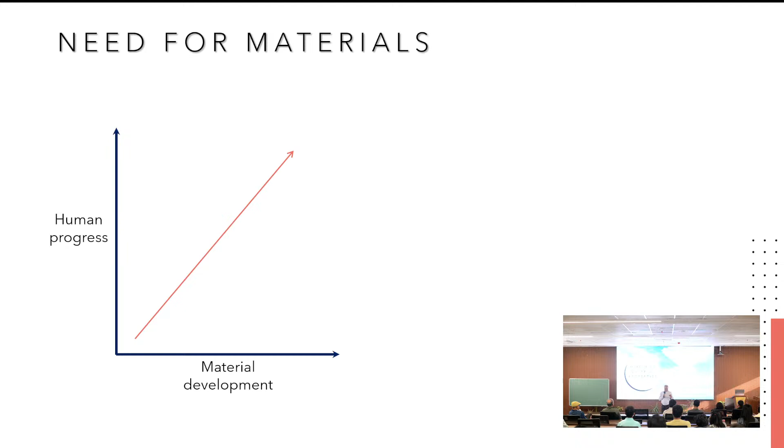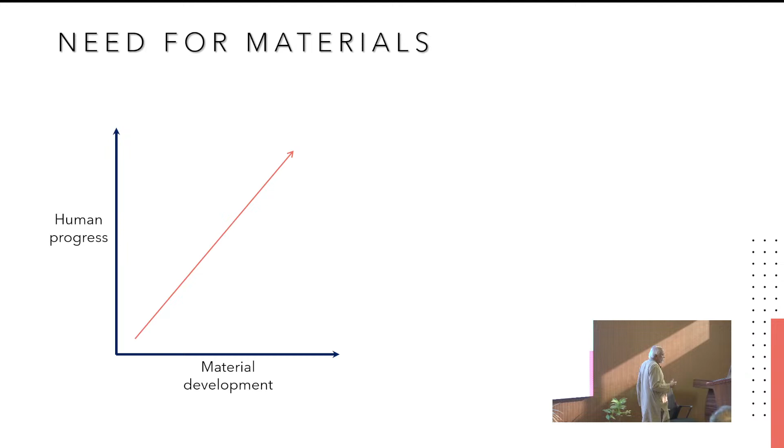As is, there is a correlation between energy consumption and the development stage of a society. There is a correlation between how much per capita energy humans consume and the state of development of society in some sense. So similarly, you can see that as we progressed, we have constantly developed new materials, or you might say as we developed new materials, we actually progressed. So that means there is a very close relationship between these two things.

So in the early stages, primarily our focus was on utilizing naturally occurring materials, right? So naturally occurring materials can be of two types when you look at our forefathers.

Is it going? Yeah, okay, thank you.

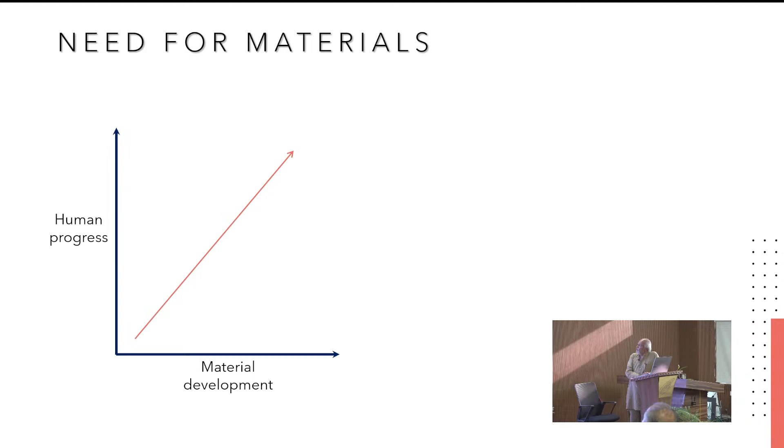So they can be of two types. One is directly usable, which means as is present in nature, you just modify, scrape, sharpen, do a little bit of work on it, and you can use them directly, right? The other is something that needs processing. That means it's naturally available, but you can't use it as it's available in nature. You have to do something to it to improve its properties. So there are two categories there.

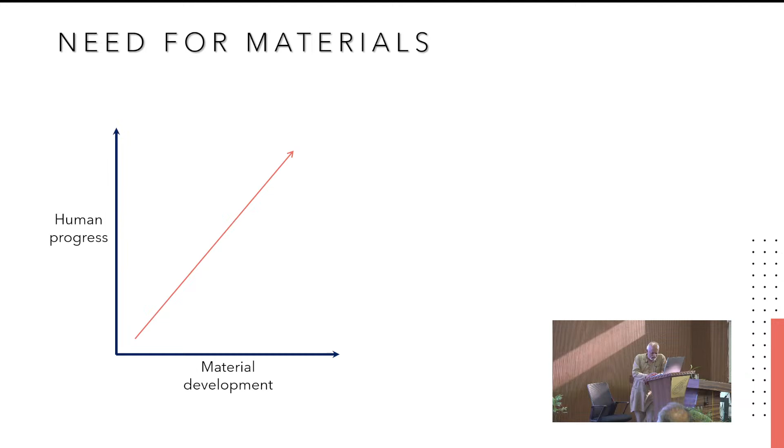And these are mostly tools that are used for hunting, and you should remember those days humans primarily engaged in generation of food, and food was largely generated by hunting. So they were hunter-gatherers, and one of the things that set them apart, as Guruprasad mentioned, is the fact that they could actually make these implements using naturally occurring materials, which made them a step ahead of the rest of the animal kingdom. So you could develop sharp tools.

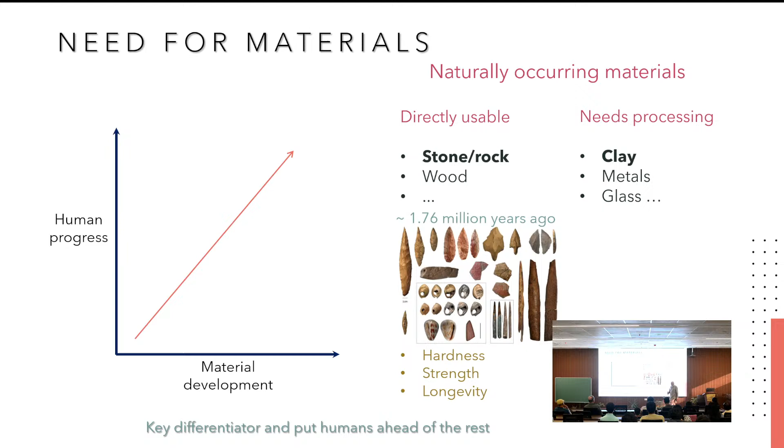So what are the properties that these need to have in order to be effective? They need to be extremely hard. They need to be strong. They should not break when you're hunting. You shoot something and it breaks and you're finished. And the other was longevity. That means you want these tools to last for a long time. So these were probably some of the most important properties under consideration for those who developed these implements early.

And of course, clay requires processing, which means you have to fire it. You can use clay, but unless you fire it, you will not be able to develop these kinds of things. And so these date back to about 6,500 BC, which means almost 8,500 years ago. So some of the earliest pottery that people have seen was these from various parts of the globe.

And what are the properties that this material had? Formability, that means how easily can you shape them into various objects that you desire. So that was one. Of course, strength, longevity, and because these are containers, you need to be able to hold liquids without leaking. So that's another property that you want. Porosity needs to be controlled. Since the focus of this talk is really on properties, I just want to highlight the properties that early humans would have been looking forward to having in these materials.

And of course, thermal conductivity. That means if you need to heat something up, you need to be able to conduct the heat through these containers. So those were probably some of the very early materials developed using naturally occurring materials, both directly by making a little change in the shape or by using processing methods. The second, of course, is wood. Wood was also much earlier. So this is about 300,000 years ago.

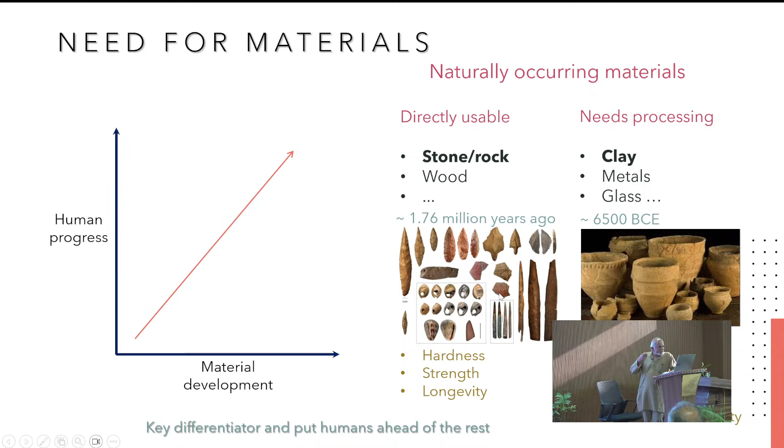People have learned how to use wood. And wood, as you know, has different levels of hardness. As they are procured, some wood is relatively soft depending on the nature of the wood itself, and others are hard and much stronger. So early years of utilization of wood would have actually gone through this. People would have gone through this selection process to identify wood that is strong, doesn't decay so soon, doesn't putrefy, and so the oil content in the wood would have been very important.

You know, oil content in the wood and the density of wood is what distinguishes the hardness and processing properties and the strength of the wood itself. So again, workability and strength would have been the key properties that we're looking for.

And of course, glass, which is about 3,000, which means 5,000 plus years ago. And one of the properties apart from what you had in clay is that these were transparent, and there would have been a very important development in the eyes of people who first did it. That is to get some object that is not opaque but is transparent, while at the same time has many of the properties that clay did. So these are a couple of examples of early materials that people had, and also it describes some of the properties that our forefathers would have actually been looking for in these materials.

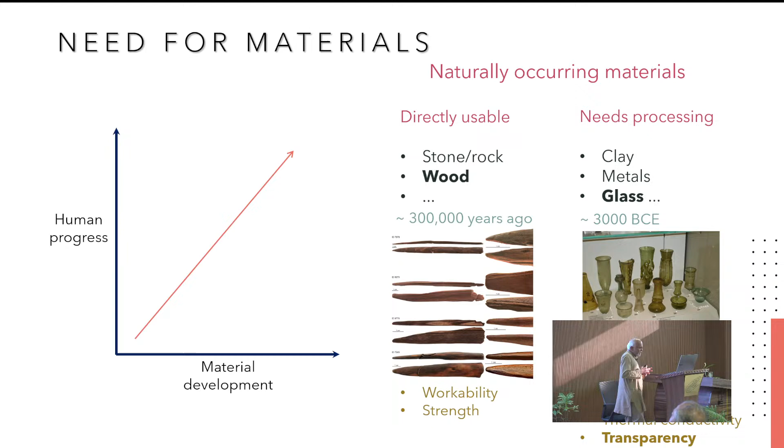Okay, and then came the age of metals and alloys. These are clearly materials that need processing, right? They are not used directly. And some of the earliest metals that were used was copper. That's roughly 5,000 BC, and then bronze, which is an alloy of copper and tin, which is about 3,500 BC, and iron, which is more recent, which is about 1,500 BC. So these are the three main metal-based materials that early humans actually learned to work with.

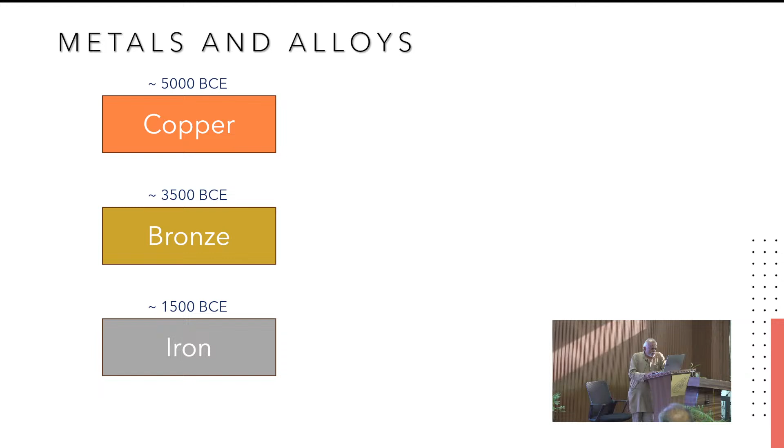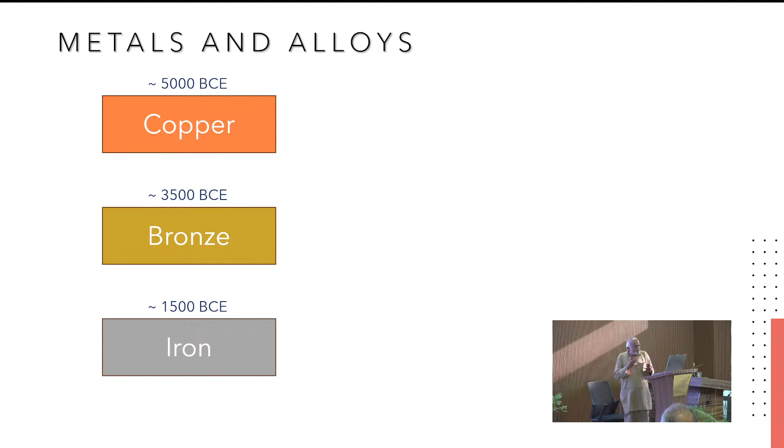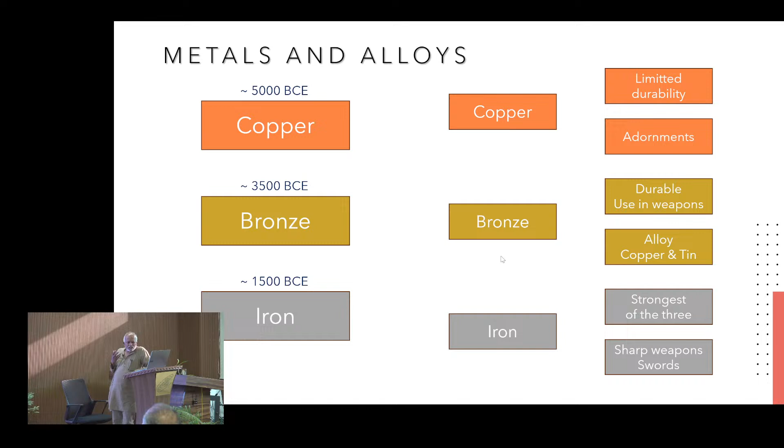And of course, what are the properties of these kinds of materials that you would be interested in? Copper has limited durability and was largely used for coinage, so coins and adornments. That means decorative parts to wear, okay, adornments. They were primarily used for that. Bronze, which is an alloy of copper, was much harder and much stronger, and began to be used for weapons, okay. So durability was one of the properties that were there, and hardness improved enormously.

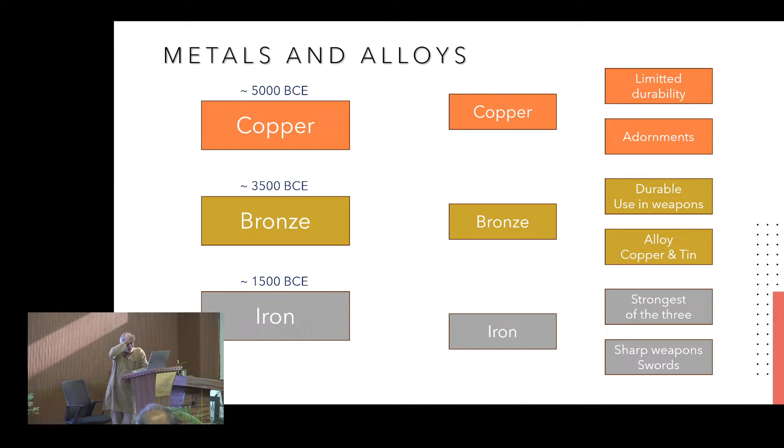So as I mentioned, bronze is of course an alloy of copper and tin. Alloying, the idea of mixing two metals, was one of the earliest forms of improving properties of metals, okay, and this gave a remarkable improvement, much more than what you would expect compositionally. So that means very small amounts of a second component can enormously improve the properties of metals. This is something metallurgists and early man realized.

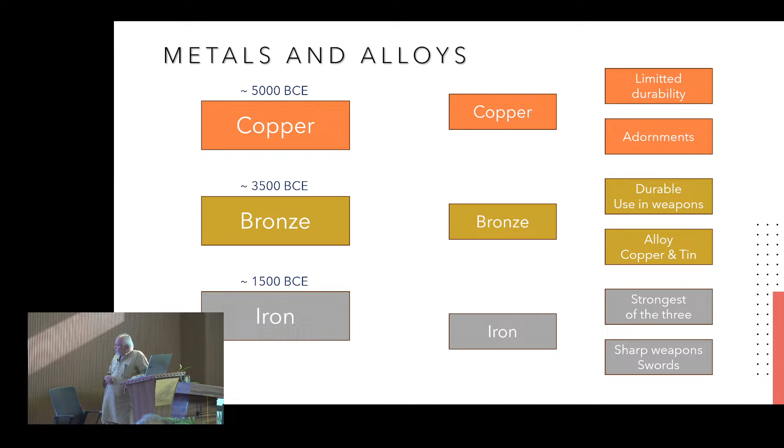And iron, of course, was the third one, which is the strongest of the three, and eventually replaced much of the earlier metals that were used by humans. So iron became the workhorse subsequent to iron's discovery. Iron's strength made it among the best materials that you have. And from iron, of course, steel; I will tell you the story of steel. The sharpness of swords and so on were clearly far better with iron. So the period between 1200 BC and 600 BC is roughly believed to be, in some region, the Iron Age.

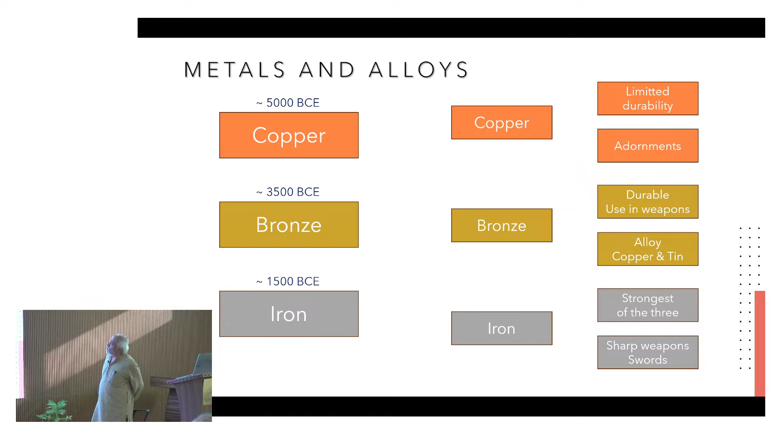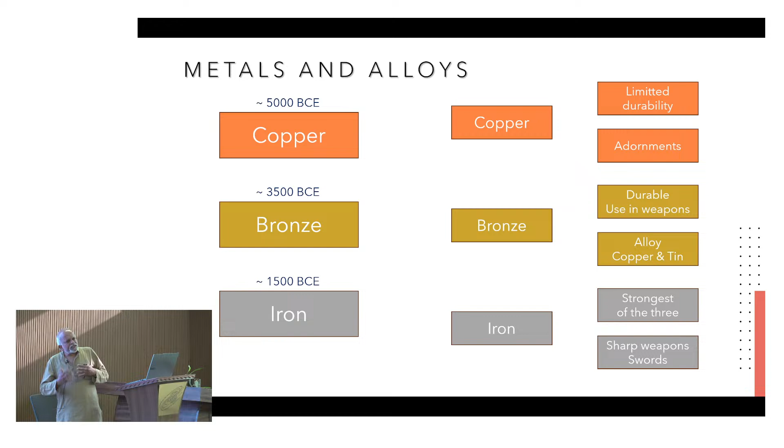Okay, iron was a transformative material because it changed very many things, just really made humans far more powerful and far more progressive than the rest of the species. I would say it was really a stage that demonstrated a dramatic difference of the importance of materials in human development. So, the key properties of iron, as mentioned earlier, are its strength, hardness and formability. By formability, I mean I can shape it in various forms that I require.

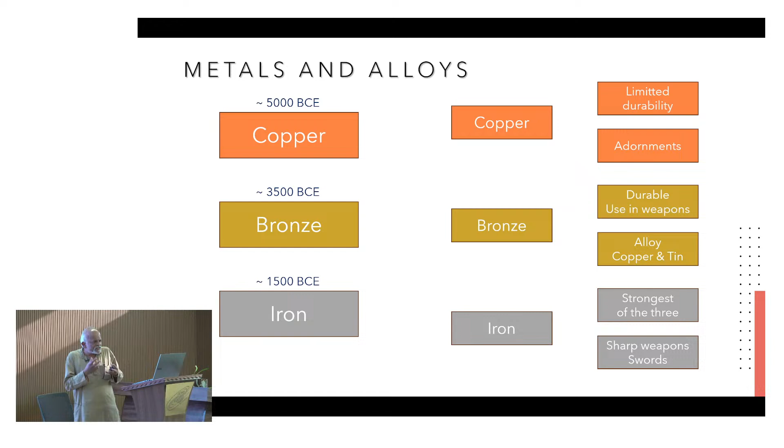The early way of shaping metals actually was to soften the metal by heating it. That is, you make it a sponge iron, that is, get it very hot and slightly porous, and then you hit it with a hammer or something that is hard to form it. Okay, so that was one of the earlier methods of making it. This is a good method, but you can't get fine tools. Fine tools with high levels of sharpness are not possible by this process of basically deforming materials at high temperature.

That means you shape it when it softens a little. Okay, so finer tools and weapons were still not accessible, although for a lot of purposes that process worked. The most important development in handling metals was actually to be able to warm it up to temperatures where it became molten. And that came only when they realized how to get furnaces, or how to get material hot enough to be able to melt metals. And that came in later.

Okay. Metal is a single element, like iron is one element. Alloy is a mixture of two elements. So, if you have copper and tin, you get bronze. So, copper is a pure element. In which class are you? Fifth. Okay. No, it's okay. It's all right. So, an element is a pure element. You know what an element is? Yeah. So, metals are pure elements and alloys are a mixture of two elements.

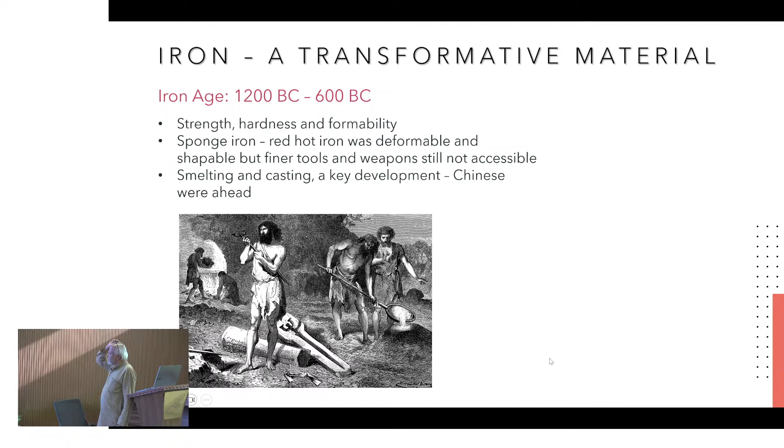So it means societies in India, China, and in the Middle East, Mesopotamia, knew how to work with metals. And these were around 1500 BC. People knew how to melt, work with metals, mix alloys, and generate stronger metal based materials.

So, I think the other most important, more contemporary development that happened in materials is the discovery of steel, that is iron with a small amount of carbon. Adding a little bit of carbon improves its hardness and strength remarkably. This most likely would have been a chance discovery, because the way they melted the ore and isolated the pure element was by cooking it over coal. Coal is primarily carbon, so what might have happened in the early stages is a little bit of carbon would have migrated into the molten iron and generated a mixture of iron and carbon, which was steel.

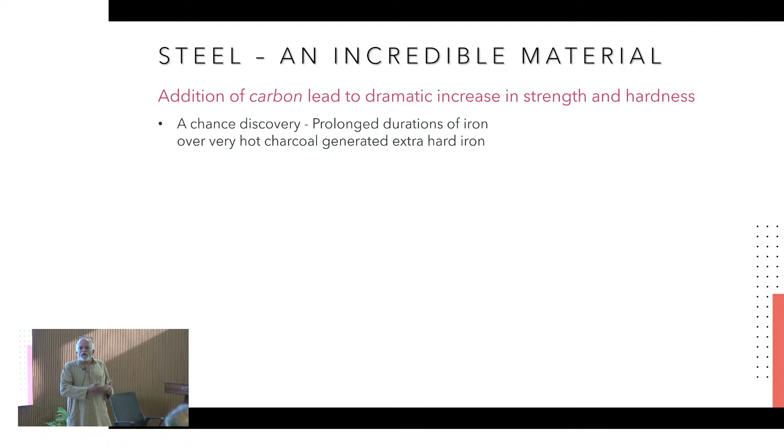In all likelihood, as is conjectured by somebody who has written an article which I was reading, they may have left the molten iron overnight over hot coal. Over a long period of time, molten iron would have gradually taken up a little bit of the carbon from the coal. And to their surprise, they would have found that the properties were far better.

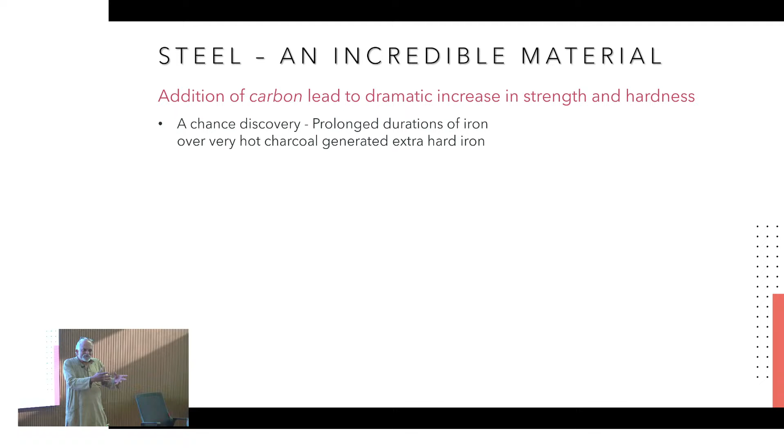They were also scientists like today, except that they did not have the tools to investigate what was happening as we have today. But by experience, by looking at what would have happened, they would have conjectured that leaving the metal for longer times over coal actually improves the property. Go on.

Yeah, it has an optimum level of carbon. You can change the properties of steel depending on how much carbon you have. Okay, stainless steel is another composition of metal, iron, which has both carbon and some other elements. So, you can change the composition. These are complex phase diagrams.

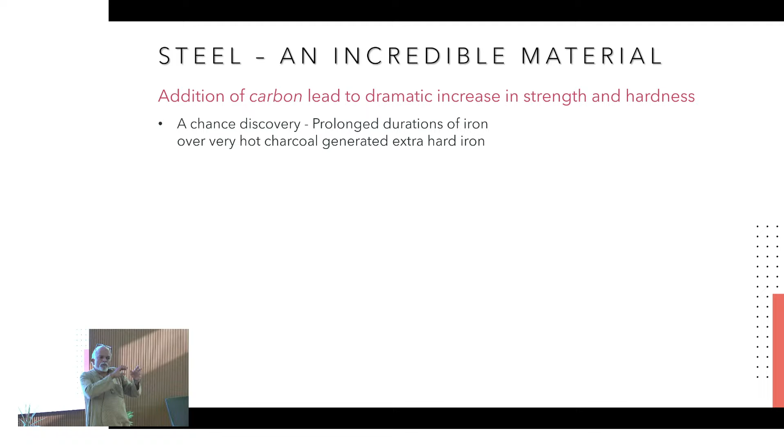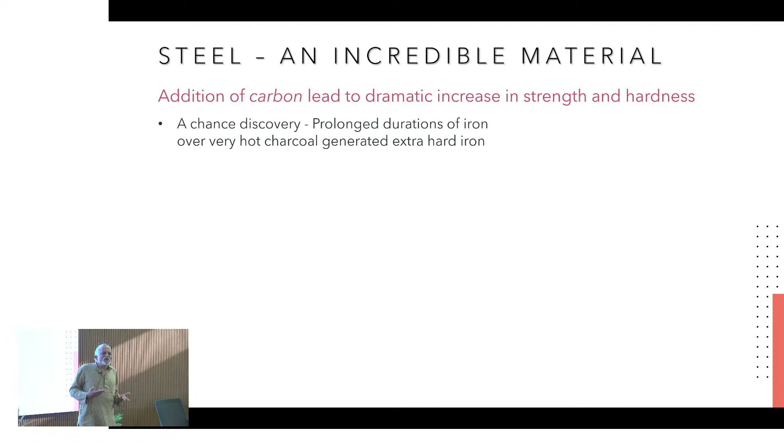Phase diagrams means, if you are looking at how a property evolves as a function of composition, it does not necessarily simply constantly improve. Many of the properties go through a maximum. That means some amount is okay, but if you add more than that, the property actually goes down. The natural way to think about it is, if I add a little carbon, it is getting better, so why don't I add more carbon, it will keep getting better. That does not always work, for a variety of reasons.

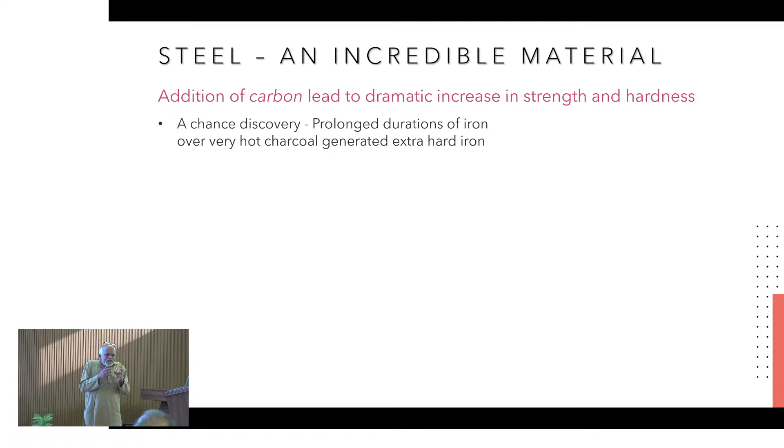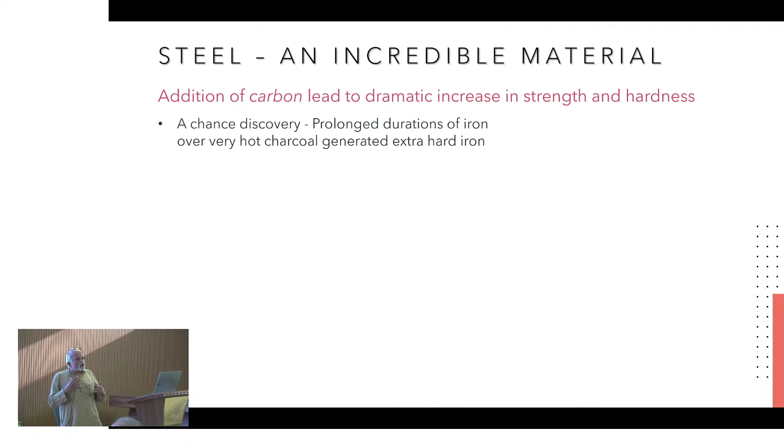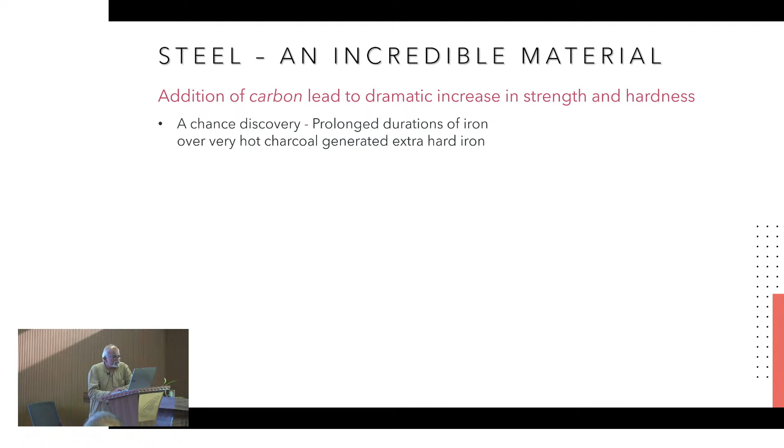And the most important thing about these tools was that when you discovered steel, you could work it into much sharper implements. The efficacy of your weapon depends on how sharp it is. If you have a blunt knife, you're not going to be as effective as if you have a sharp knife, clearly, right? So people who learned the technique of making steel and making much sharper weapons had an upper hand in the way they handled their enemies.

So think about societies in the earlier years. They were largely societies going around trying to capture more property, trying to get richer, trying to get more food. So they were hunting around, constantly moving from one region to another to find better. And if, in their process of moving, they encountered resistance, they would have to fight. And those who had better implements would win the fight, and they would have more access to resources.

So societies progressed by gaining access to resources, and the only way they gained access to resources was to constantly move and look for resources in neighboring areas and actually fight wars with those in the neighboring areas. So you can see it would have made a very important difference to early development of societies.

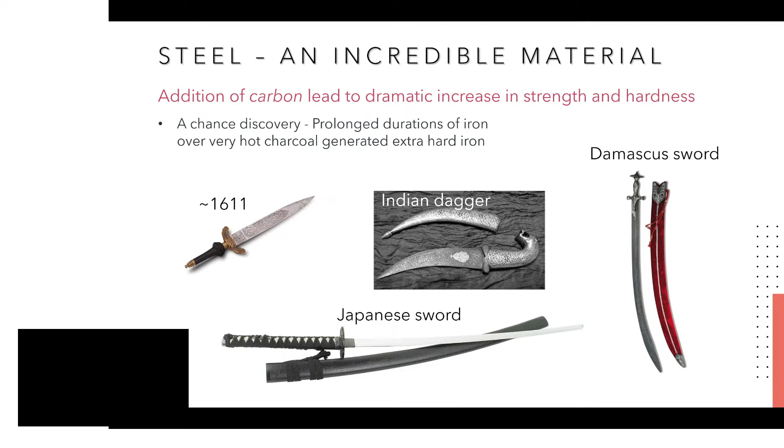Mass scale production of steel had to wait a little longer, although blast furnaces that were not electric, coal fired and other blast furnaces, existed prior to this. Mass production of steel had to wait for the invention of electric power. Most of the electric arc furnaces required electricity, right? And electricity happened a little over 100, 110, 120 years ago. So it's not so old.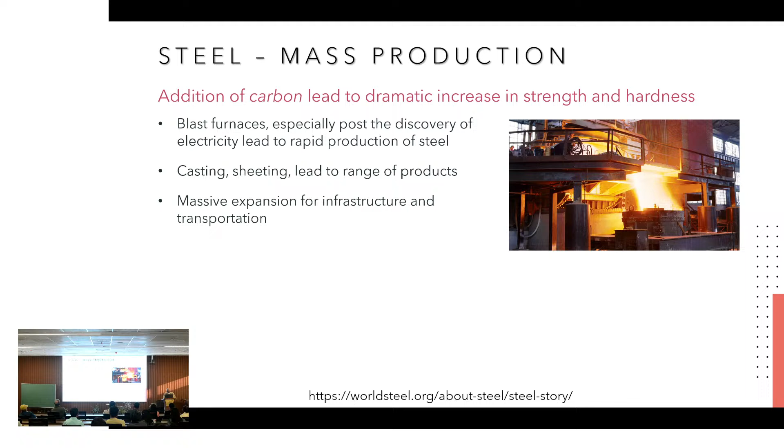What you're seeing is basically molten steel, and as you know, when you heat metal, it gets red hot and radiates light. So that emission of light is what you're seeing with molten metal. It's being poured into a vat into which you either cool it or allow it to move into other regions. Some of the most important engineering progress was to develop techniques by which you can cast iron into shapes that you want, and steel began to be used, as you see even today, extensively for developing infrastructure and transportation.

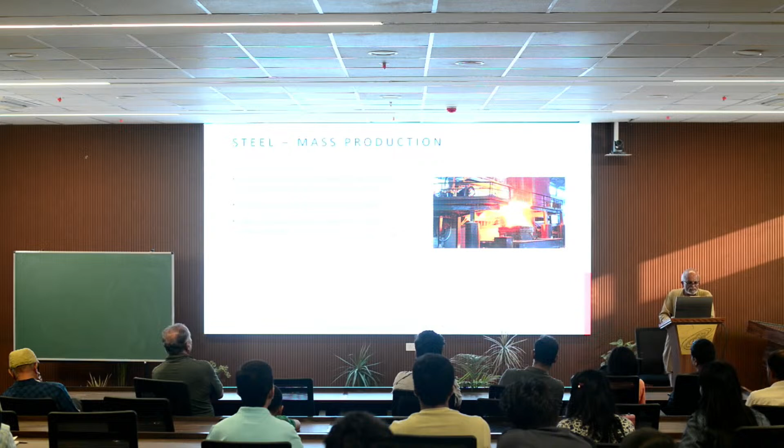So here is an example of how molten steel is cast or converted into sheets. These are rolls of sheets of steel. I don't know if any of you have gone to an actual steel plant. I had the fortunate opportunity to visit a steel plant, and it's absolutely remarkable. The scale of a steel plant is something that you should see.

You still cannot go to a steel plant, young lad. You have to be at least 16, I think, before you can visit a steel plant. My son was less than 16 when I visited. He couldn't go, unfortunately, at that time. But it's absolutely something that all of you should visit if you haven't visited one.

So, here is what is done. Molten steel is actually poured into some kind of region which creates a flowing liquid like this, between rollers. And this flowing liquid goes and becomes a block. It continues to remain hot. You should remember the capacity to hold heat for a metal is very high. That means it doesn't cool so fast. It cools, it takes time to cool.

So, it continues to be molten, but it hardens as it moves. It is cooling down and it is beginning to solidify, but still soft. As I told you, heated metals continue to be soft. So, when it's soft, you can press them between rollers, and effectively if you reduce the distance between adjacent rollers as you go forward, it will squeeze the metal to become thinner and thinner as you go towards the end.

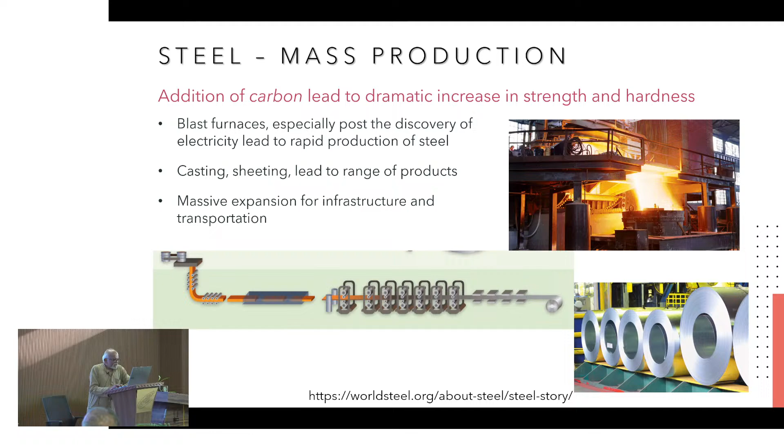You said steel doesn't rust, so what's the difference between stainless steel and steel? That steel doesn't rust is not fully true. Steel rusts very slowly, but it's very hard compared to pure iron, cast iron. Cast iron is more brittle, but steel is not brittle, it's hard and it's tough. So, that's the big difference.

It is not completely resistant to rusting. If you look at the railway tracks, on the sides where the surface is not refreshed by the movement of wheels, they are rusted, but only the top surface is clean. And the top surface is clean only because the wheels of the train are constantly moving on it and abrading any rust that is forming. So if you leave a rail track unused, the top surface will also rust, slowly. But stainless steel will not rust.

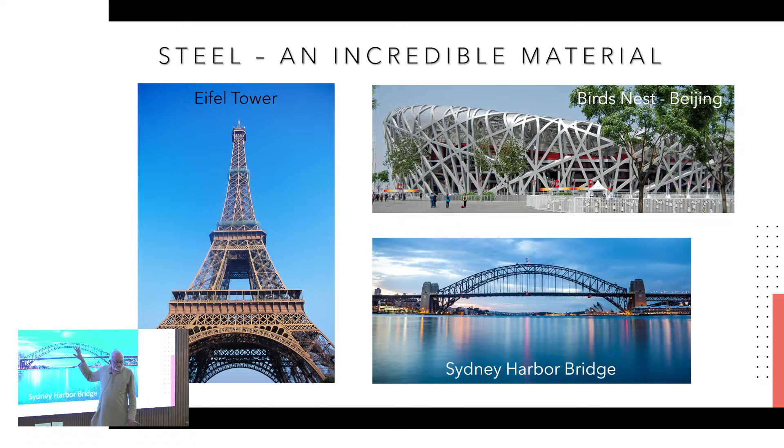All right. So this is the incredible thing that you can do with steel, right? You can construct this. Imagine the entire load. This is a fully steel bridge. That means all the load of the vehicles that are going there are borne by that steel. Steel is primarily the structure that is giving you the strength of that.

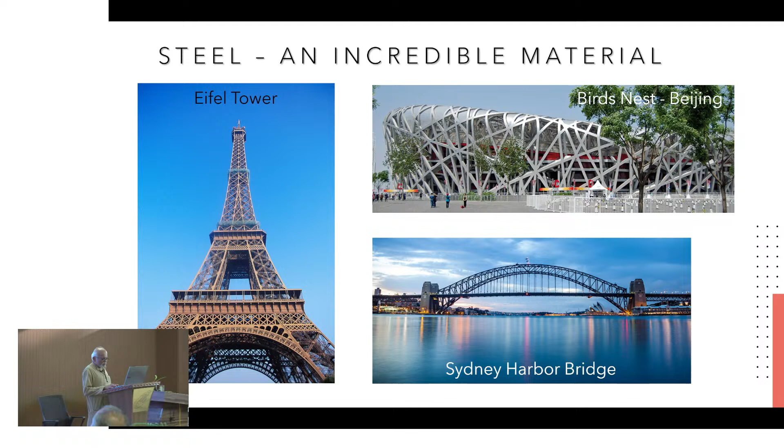And these are the only 2 points at which it's contacted. So this entire thing is basically supported at the 2 ends with the help of those cables, of course, running on top of this, holding it, right. So it's a cable bridge, suspended bridge. Okay, so now let's just take a pause here.

So much of the early focus of material development was primarily on mechanical properties. As of now, I've only discussed properties of materials that give you strength, formability and durability, right. So strength, hardness and formability were the 3 main parameters of properties of materials that people sought at those times. And what were they making with it?

They were making weapons, agricultural implements, of course, to dig soil, as agrarian societies clearly formed by then, and construction material and transportation. So this is all what they were using, and for that, those properties, that is strength, hardness and formability, were adequate to address most of the properties that were required.

Okay, the discovery of electricity and power generation was clearly a turning point in the evolution of materials. The search for new materials with new properties accelerated rapidly once we had electricity. So you can make a connection between electricity and rapid transformation of material science. So incredible development of novel applications soon followed, right. So we'll see what it is.

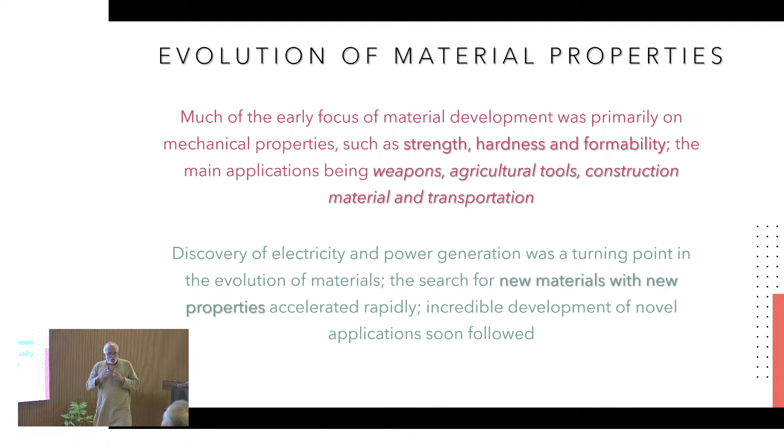Aluminum, I didn't say much about it. Aluminum is a relatively young material of remarkable strength, and all I'm going to say about aluminum is this: it's really a remarkable material with outstanding strength to weight ratio. It turns out that aluminum as an element, as a metal, is far less dense. That means weight per unit volume.

That's density. It means you take 2 cubes, each cube of, let's say, 5 centimeters by 5 centimeters by 5 centimeters, you will see that iron is much heavier than aluminum. And therefore, if you measure the strength, normalize it, which means you say strength per unit mass, how strong is it with respect to its weight, then aluminum does exceedingly well. And that's one of its strengths.

And today, if we did not have aluminum, I suspect that air travel would have been far more difficult. Most of the chassis of the aircraft actually continues to be aluminum today, but very soon we may have organic composites replacing aluminum. Okay, so that is about all that I have to say. All I want you to remember is

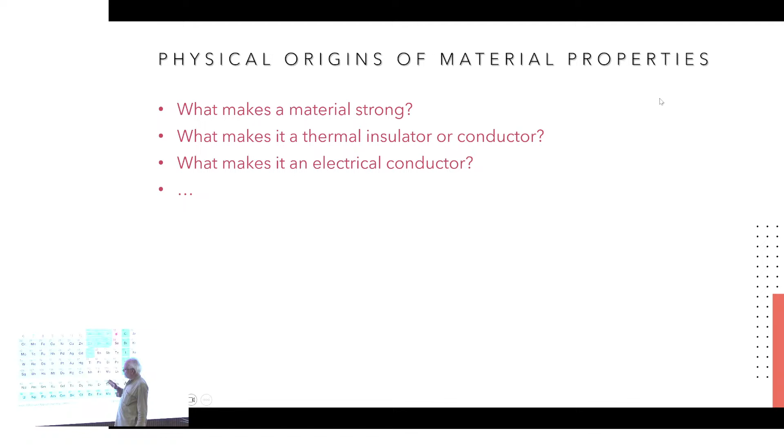Now, the 20th century, which is the 1900s, till we came to the 21st century. So what are the elements of the 20th century, if you were to ask me? I would say these were the elements: primarily boron, carbon, nitrogen, aluminum, silicon, phosphorus, gallium, arsenic, indium, tin as well. So the focus shifted from iron, copper, zinc, tin, and so on, to these elements. These elements became the focus of the last 100 years.

So I'll say a little bit about silicon, because silicon is probably one of the most important elements today in the context of our life. Silicon is just below carbon. For those of you who know a little bit of chemistry, silicon has the same number of valence electrons as carbon. It follows in the same group, it just has one more shell. So some aspects of silicon behavior are similar to carbon, but most of the others are very, very different.

So it turns out that silicon is a semiconductor, which means it doesn't conduct electricity very well, but it's also not an insulator. It lies somewhere in between. So you can heat it up and get conductivity to happen. But what people figured out very quickly is that, just like alloys, you can mix one element with the other; here, of course, you needed to understand the fundamental chemistry and physics of these materials.

So what you should remember is anything left of silicon has one electron less in its valence shell. Anything to the right of silicon has one electron excess compared to silicon. So if this has 4 valence electrons, this has 3, and this has 5. So people figured out that you can dope; it's called doping now, not alloying, but the idea is similar. You put a little bit of boron or aluminum or gallium in silicon, and the sizes of silicon and these atoms are not very different.

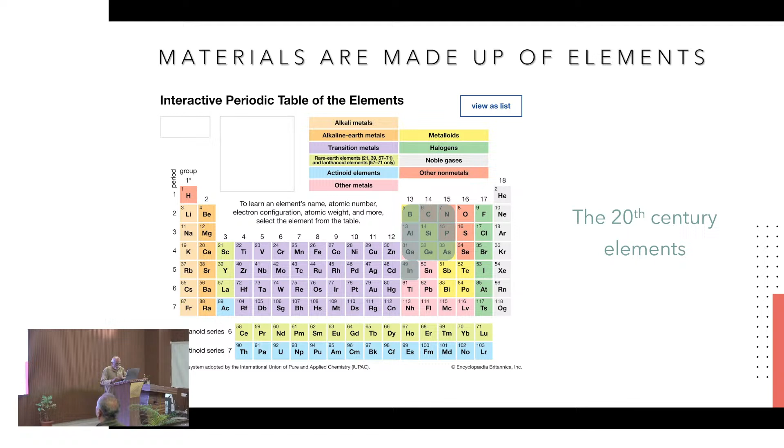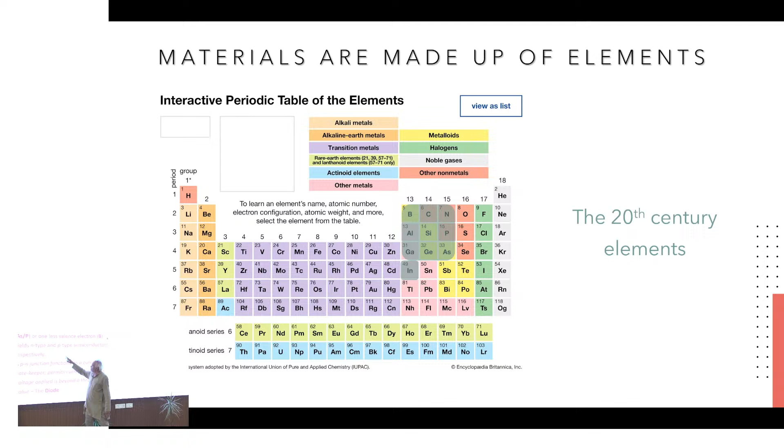That is fundamentally the idea. So, that is what I have written here, right. So, you have one less valence electron or one more valence electron, and then you develop two types. If you have an extra valence electron, you have an n type semiconductor, which means electrons are the species that are moving. If you have one less electron, then you have a p type semiconductor, which means the holes are moving, okay.

So, that is fundamentally how people developed solid state physics, and it turns out that if you take a material that has excess electrons and another species that has excess holes, and you put them in contact, then you create a very interesting species called a p-n junction, okay. And it turns out that a junction like this has very interesting electrical properties. So, this is a p-n junction. This is called a p-n diode.

So, this is a p type semiconductor and this is an n type semiconductor, and you apply a potential. I told you generation and discovery of electricity was key to development of materials subsequent to that, okay. So, here is an example. If you have a p type, which is positively charged, but you connect it to the negative electrode, and this is negatively charged and you connect it to the positive electrode, then you are pushing the electrons the wrong way, okay. So, that is called a reverse bias, but if you put it the other way, it is a forward bias,

and it turns out that a diode like this is a one-way current valve. There are non-return valves called NRVs, valves which allow liquid to flow one way, but not the other way. The valve in your heart is a one-way valve, okay. It is a flap that allows blood to flow this way, but blood cannot flow back down, right. So, a diode is like a one-way valve. It allows current to flow in one direction, but does not allow current to flow in the opposite direction.

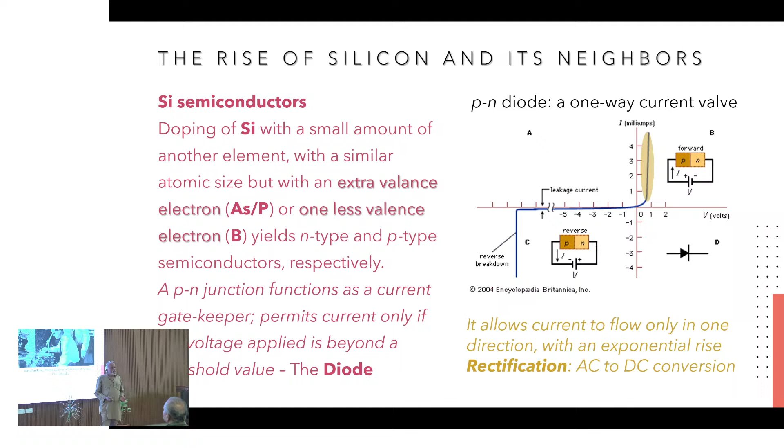But more than a diode, the most important discovery was the PNP junction. If you have a P type semiconductor, N type, another P type, and you make a sandwich, then you get a transistor, or you can have an NPN. So what this does is quite interesting. Firstly, it can amplify the current. It can act as a switch. That means depending on the voltage that you apply, it can either allow the current to go through or stop the current.

Okay, so it's a switch, and this is fundamentally the basic element of all gadgets that we use today. Every electronic gadget that we use today will have transistors, not one, but hundreds or thousands or millions even. Your computers will have millions of transistors. So these are basically a huge network of things that will either allow or disallow, and by that process of allowing or disallowing, you are creating a complex circuitry that allows you to do many calculations and many other things. You can regulate power, control current, and do a lot of things.

This was discovered, imagine, just in 1947, when we got our independence. So it's really just over 75 years old. So very new. And this is probably one of the most important discoveries that mankind has made, because it transformed the ways in which we live at remarkable levels. It's the heart of all computing devices, your cell phones, everything.

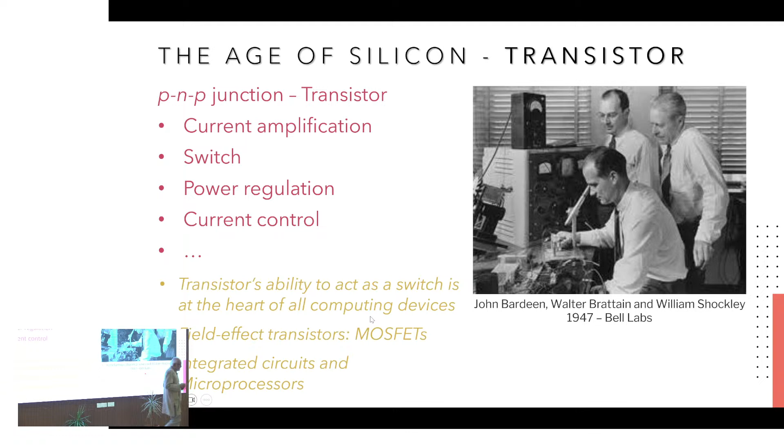And of course, instead of a typical transistor, there's a slight development. I won't go into the detail. It's called the field effect transistor. That is what is used today. A field effect transistor simply applies a small voltage that controls the current that is going through two other leads. You apply a voltage to the gate, and then you control the amount of current that goes.

And MOSFET is one example of an FET, that is metal oxide semiconductor. And all integrated circuits, which you call ICs, and microprocessors use numerous transistors in combination with various other circuit elements. And Bardeen, Brattain, and Shockley were awarded the Nobel Prize for the discovery of the transistor.

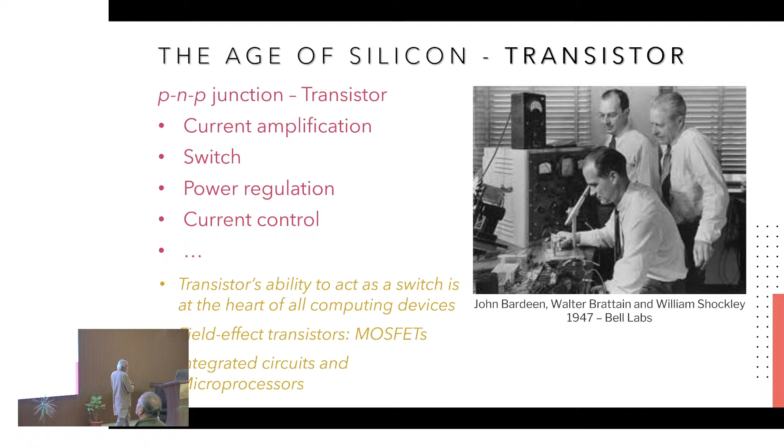Okay, so light and semiconductors. We have talked about current conducting ability, devices that use materials to control current as a function of voltage, and that turns out to be important. What about light and semiconductors? This is another property called electroluminescence.

How am I doing with time? Can I take another 15 minutes? Please. Okay. We started at 4:15, I think.

So electroluminescence is another interesting property where you apply a voltage and the material gives out light. That's what luminescence means, something that gives out light. Electro means you apply a potential and it gives out light. And photovoltaics is the opposite of electroluminescence. In other words, if you shine light, it will develop a potential. That means you can use solar energy to do work. You develop a potential and you run some load from the two leads, and you can do work. That is the idea of photovoltaics.

So in some sense, electroluminescence and photovoltaics are opposite processes. In one, you apply potential and it gives out light. In the other, you shine light and it gives you potential. In a rough sense, it's the exact opposite property. But the materials that do these are completely complementary. Those that are electroluminescent typically will not be good photovoltaics, and those that are good photovoltaics will not be good electroluminescent materials. That has a fundamental relation to the property itself. But both are in the same class of materials, with subtle differences between the two.

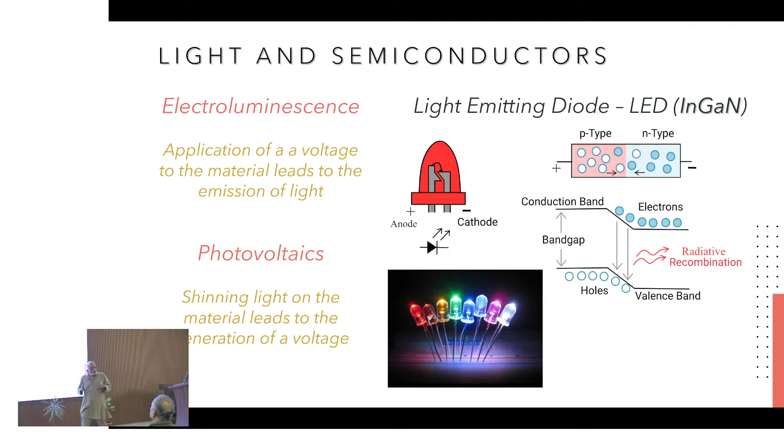Okay, now light and glass. This is another very interesting discovery that won the Nobel Prize more recently. Should have been won a long time ago, but the discovery of using glass to make optical fibers. This is probably another extremely important discovery of the last 50 years. So many of you know total internal reflection from mirage. You would have studied mirage in your high school.

That means if you're in a desert, extremely hot roads, why do you have to go to a desert? In summer here, if you have these nice tarred roads, you will actually see reflection of the tree on the road at a distance, right? And that is created by total internal reflection. What happens on a hot day is you create a gradient of air. Very close to the surface of a hot road, the density of air is less. As you go up, the density becomes higher. So you create a refractive index variation.

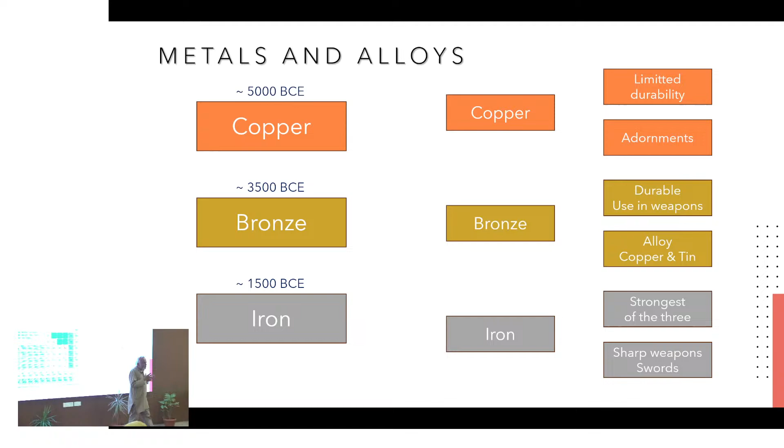Now organic materials. So I said carbon and organic materials, and now let me come to organic materials. So what are organic materials? Organic materials are basically, largely, carbon combined with nitrogen, phosphorus, oxygen, sulfur and hydrogen. Most organic materials have these elements. It can have halogens, it can have a few other elements, but largely it is these 5 plus 1, 6 and a few halogens, and that makes all of organic chemistry. All organic molecules are built up largely based on these, with a few others, as I said.

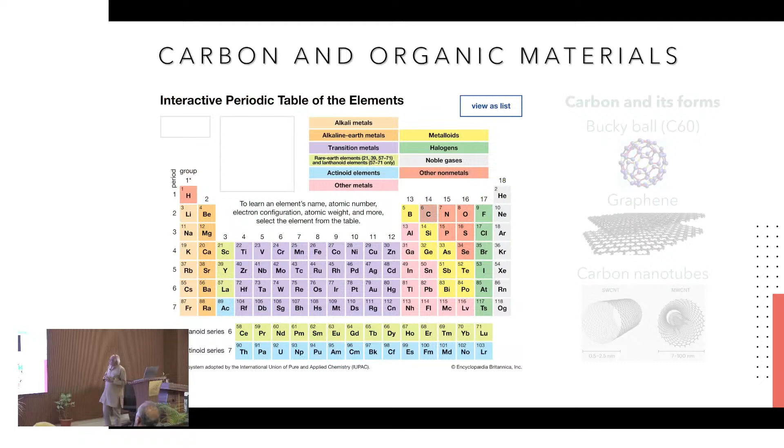So what are the organic materials that are of interest in the context of materials itself? It turns out there are three important things that I'd like to focus on. One is liquid crystals, the other is luminescent materials. Much like you have semiconductors that emit light when you apply electricity, there are also organic materials that do the same. They emit light when you apply a potential.

Those of you who have heard the term OLEDs or MOLEDs, OLEDs refers to organic LEDs. That means these are LEDs built out of organic material. It turns out that chemists have a way to change the color very easily for organic LEDs, and that's why it's become important. Those are luminescent materials, and the third, of course, is polymers. That's the area in which my research is. So I'll talk to you about these three, and then I'll close.

So liquid crystals are very interesting molecules. It's yesterday's display technology. It's pretty much gone today. It turns out that if you take molecules, these are built out of carbon and hydrogen primarily. There's no other element in this, only carbon and hydrogen.

Unlike alloys, which don't have a shape, when you combine carbon with other elements, you actually make small molecular entities, like benzene or sugar. Sugar is a molecule, right? So these are organic molecules that have a long shape, and that's why I have this representation of a molecule.

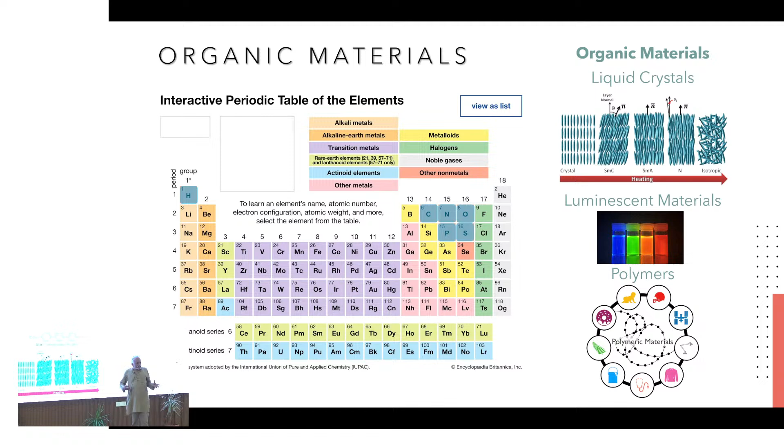When you have elongated objects, they will pack like this. Then in the solid state, if you have spheres, you can pack them very effectively. Like oranges, when you go to the fruit shop, you can see how it's packed, right? Beautifully. Those are hexagonally close packed. They know how it's stable, they arrange it, and then between the gaps they put the next orange, and they are very stable. And atoms in the solid state organize much like how in Malleshwaram or wherever the market is, they organize fruits.

But if you have long objects like this, you can't arrange them like that. And it turns out that the shape matters, because of the anisotropy. When I go from the center of a sphere to any point on the surface, the distance is the same, right? That's the definition of a sphere. But in an object that has a shape like this, from the center, the distance of different points on the surface is very different. That means the shape is anisotropic. It's not spherically symmetric.

It turns out that they will organize in the solid state in this fashion. And because they organize like this, the way molecules interact along the length is very different. The sticking between these two is stronger compared to the sticking between these two, because these are pointed regions of the molecule. So because of this anisotropy in shape, they also interact anisotropically. The molecules are interacting along this plane stronger than one plane is interacting with the other.

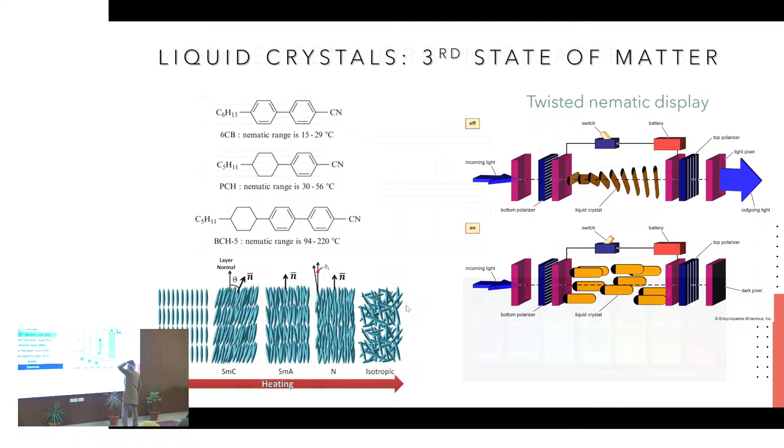So I want to just switch. If you ask me in this century, the 21st century, which is the element that is most important, I think lithium probably qualifies as being one of the most important elements as of now. It may become sodium very soon. If it does, all of us will be happy because sodium is available in plenty, lithium is not, okay. So I'm going back to this.

Lithium is an extremely light element. It has an atomic number of 3, which means 3 electrons only, very light and therefore very effective. See, this is used primarily in a battery, okay. Lithium batteries, all of you would have heard. One of the key factors in a battery is how much energy it can store per unit mass, okay. It's called the energy density.

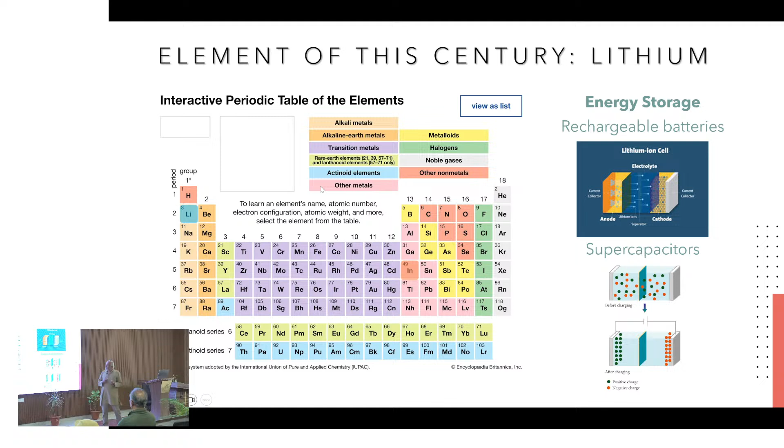It means how much energy per unit mass, and the lighter the element that you use in the battery, the mass is lesser, and so you can store more energy per unit mass, and that's why lithium is so important, apart from the fact that it's easy to oxidize, okay. So the light element is important. Which means you can have rechargeable lithium batteries, you can have supercapacitors.

One of the problems with a traditional battery is the rate at which you can draw energy from it is not very high, and all of you want cars that can accelerate from 0 to 60 in 5 seconds, okay. So if you have a lithium battery, you can press however much you want, it will only go slowly because you can't extract energy from the battery very fast. And so what is done is, it is used in conjunction with something called supercapacitors.

The subtle difference between batteries and supercapacitors is that a capacitor, as many of you know, is where you simply polarize within a dielectric medium. You pull electrons to one side and holes to the other, and you just hold it. Because the medium is not conducting, it's a dielectric, they stay like that and gradually move back. So basically you're forcing a separation of electrons and holes.

That happens very fast. In a battery, you actually cause a chemical reaction to happen, so you store energy in a chemical reaction. In a supercapacitor, you store energy by just pulling electrons and holes apart, and it can discharge extremely rapidly. So when you want to accelerate from 0 to 60 in 5 seconds, this one will back up. The battery stores more energy, but this can give you energy much more quickly. That's why they are used in conjunction.

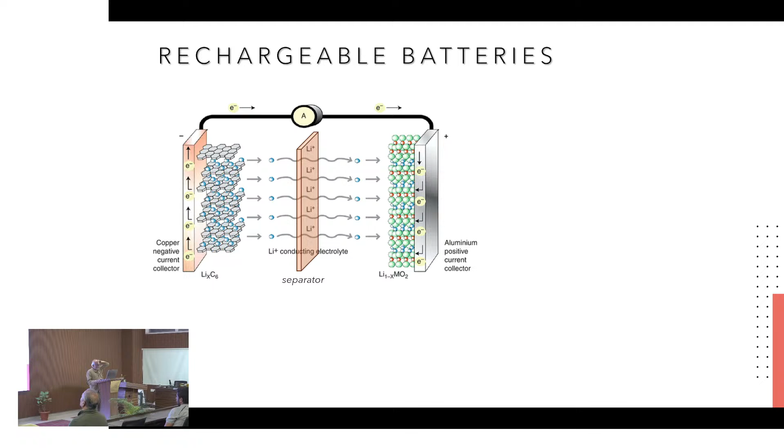Okay, so this is a rechargeable battery. I will not go into the details, but the idea is that lithium is Li plus here and becomes elemental lithium here. So that's basically it. In a sense a battery is doing this, and this is the parallel I'd like to draw.

When one is charging the battery, it's like taking water uphill. You have to do work to carry it up the hill, and when you let the water go, it will flow down automatically. A battery is exactly like that. It's like storing water up the hill so it has potential energy, and as it comes down it can do work. That's how hydroelectric power plants work: water comes down with high velocity, drives a turbine, and generates electricity.

So exactly like that, in a battery you're pushing it uphill, and when you let go, the electrons simply cascade down, and as they cascade down, they can do work exactly like water flowing from the hill. That's exactly what a battery is. Okay, I'm going to stop.

This is the last material I'd like to talk about, and more often than not people have more questions about it because it's high up in their mind. Sometime in the early 1900s, about 100 years ago, the idea of extremely large molecules became accepted. Prior to that we weren't accepting it, but all of us have very large macromolecules in our body: DNA, proteins, all of them are polymers. These here are synthetic polymers.

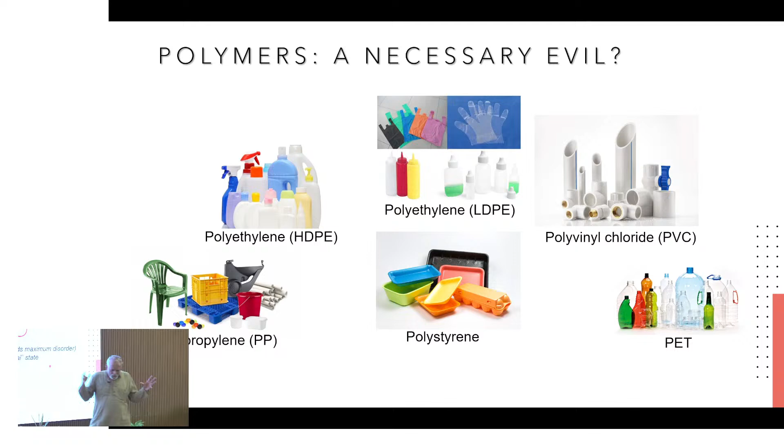What is nice is you can do this processing at much lower temperatures. You have very long chain molecules, and when stretched out they can be as long as 1 micron, but usually they are in a random coil shape, so the size is much smaller when bundled up. Okay, I will skip this and just end. Before I end, I just want to tell you why polymers are unique.

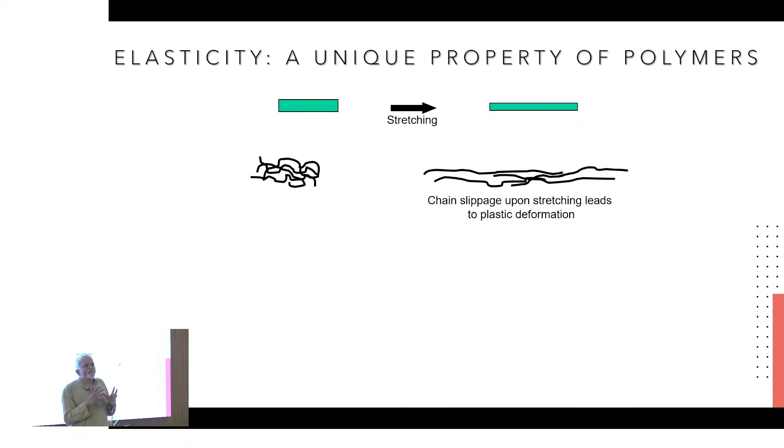You know, a rubber band is an interesting object, right? It's a remarkable object, and the behavior of a rubber band is uniquely polymeric. There's no other material that can give you such long elongation and go back to its original state. There is no other material. Okay, so this is a unique property of polymers, of long macromolecules, and why it is so unique is because

the polymer itself is actually unwinding. It is all wrapped up like this, and when you're stretching it, the polymer is stretching out without breaking. It's becoming long, and when you let go, it actually likes to go back to that shape. Okay, and that is driven by a property called entropy. Okay, so I won't worry about that.

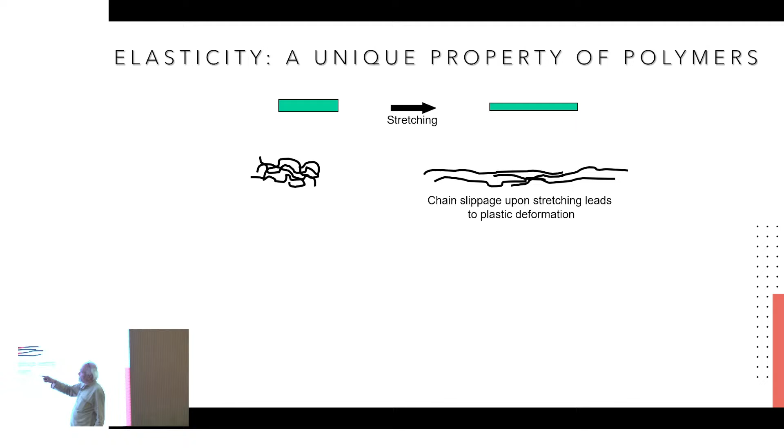But when you pull these objects, they will usually change. If you take polyethylene and pull, it will pull, but it will not go back. Okay, and that's because it is not connected. So they all need to be connected to go back. So what is done is something called cross-linking. That means you actually tie up each of these at some points.

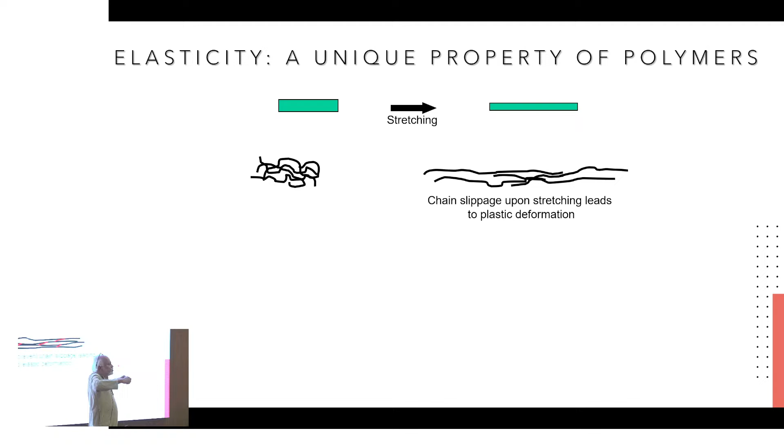Okay, each thread is not independent. It's a collection of threads, but they are all knotted at some points, so that they can't go past each other. Because of the knots, if this segment between the adjacent knots is sort of coiled up like this, then when you stretch, that segment actually stretches out. So the molecules are actually reorganizing when you change the shape. Okay, and that's primarily why it is.

I will skip this. I think it's just almost too much time. So I'm going to end now.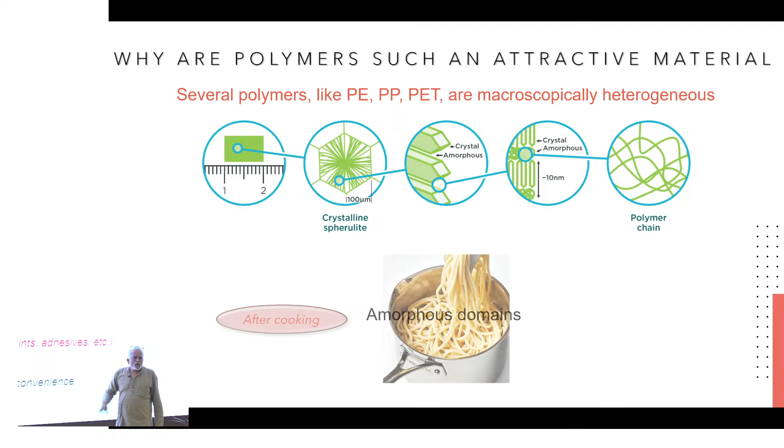Okay, so I'll just end by saying a few important things about polymers. Why have they become so indispensable? One thing is lightweight, it's easy to process and form. You can make all kinds of molded products like buckets, bottles, films, food wraps, carry bags. This is the bad word today. Fibers, textiles, a lot of you are wearing polyester, coating, paints, almost everything today that we use constantly in our daily lives is made of polymers.

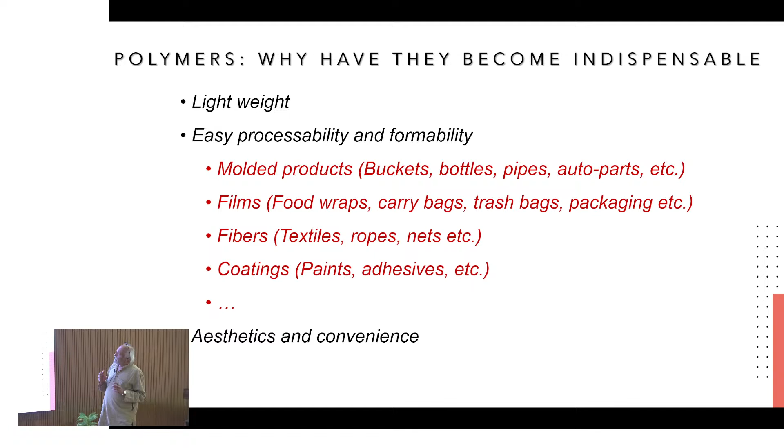So you can't really wish it away. It's going to be around. We have to use it more responsibly. Okay, so it's made life more convenient, but it's also aesthetically beautiful. So polymers in the environment. What are the positive implications of using polymers? Are there any? I'll tell you there are many.

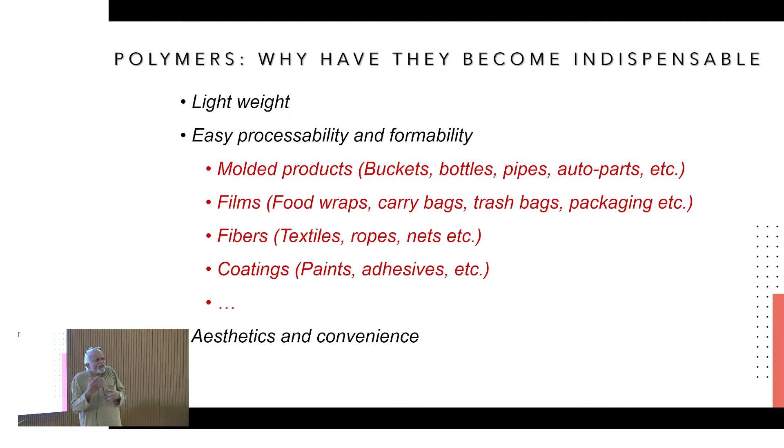Okay, so the first thing is like wax. Wax melts at 60, 70, 80 depending on the length of the chains. Polyethylene is basically wax of very high molecular weight. There's no difference between paraffin wax and polyethylene except the length of the chain. As you make it longer and longer, the melting point goes up, and polyethylene has a melting point of about 140 or so. Which means if you take it to 140, it will melt exactly like wax. You can pour it. So the way you work with wax is exactly the way you work with polymers.

And the beauty is the processing temperatures. Unlike iron, which has to be taken to 1200 degrees centigrade, heating anything to that temperature requires a lot of energy, correct? So here polymers are processed typically at temperatures below 200, which means the amount of energy required to process it is far smaller than the amount of energy to process metals or ceramics.

So the more energy you use, the more environmentally unfriendly you are. Because as of today, much of energy is being generated by processes that lead to carbon dioxide emission, and therefore it's an environmental hazard. Okay, so that's one big thing. The second thing is lightweight.

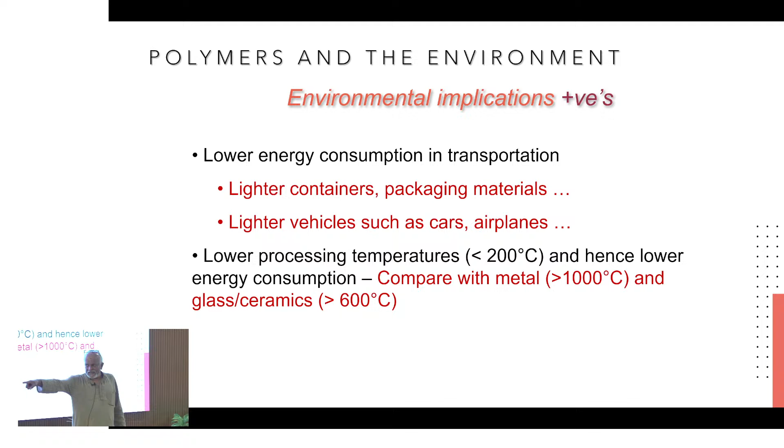So imagine you have a bottle, these PET bottles that you buy at home, the large ones are 25 liters. 25-liter bottles that you buy in bulk, that kind of bottle, right? Those things were initially coming in glass. And imagine the weight of a glass container of that size compared to that of a plastic container. So this one, 25, how much is the weight of 25 kilograms of water?

25 liters of water, I guess. How much is it? I gave you the answer, 25 kilograms, right? 25 liters of water is 25 kilograms. So for carrying 25 kilograms, if it were a glass container, the container itself will be weighing about 10 kilograms. Okay? So you're carrying 10 kilograms of a container for carrying 25 kilograms of water, the liquid that you need.

If you have a PET bottle, the PET bottle will probably weigh about 150 or 200 grams. That means 1/5 of a kilogram for 25 kilograms. So you can see when I'm carrying water, I'm mostly carrying water and the container has effectively no weight. Okay? So my transportation costs are going to go down. That means I will burn less fuel transporting plastic bottles than glass bottles, which is the other alternative.

So clearly these are two important environmental positives. Many environmental negatives. Okay? Is it renewable, etc.? People are working on that. Can I have an endless source of plastic? Most important in everybody's mind today is pollution. That means we are using plastic and throwing it away very irresponsibly. Okay? So it's not the fault of the plastic, it's our fault that we simply have not educated ourselves adequately to decide how to use, where to use, when to use, how to discard, and how to reprocess. So those are the key challenges today that we need to address.

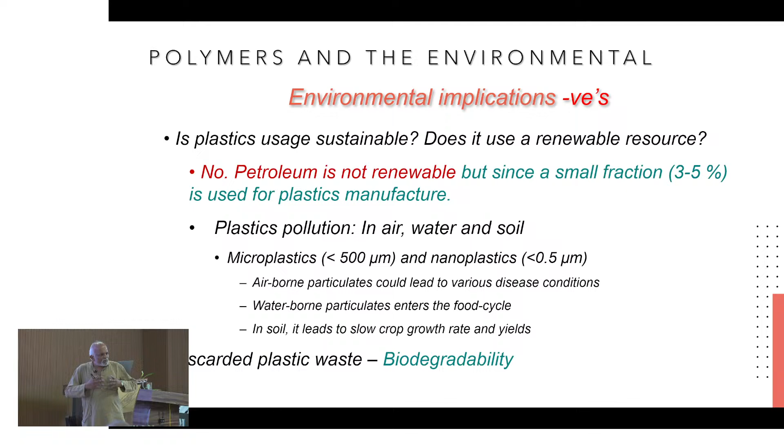Okay, so this is my last slide. I've come to the same slide as before. So I'd like to end by saying material development has been closely linked to the betterment of the human condition. We will all agree there's a close correlation between the human condition and material development. As we better understand the fundamental origins of properties exhibited by materials, apologies for that mistake, newer properties and unforeseen applications will certainly result.

I have not spoken about many materials like superconductors, for instance. They are still nascent because we don't have a room temperature superconductor yet. If we have it, it would be a remarkable development. So unforeseen applications will emerge, elevating human societies even further. No question about it. But overexploitation of natural resources in search of new materials, new properties and new applications is clearly impacting our lives adversely. When we overexploit our environment, we will have to face difficulties. We have created new problems, ecological and environmental damage, and the climate crisis which is looming large.

In the process of smelting iron and doing all this, we have emitted so much carbon dioxide and are continuing to emit carbon dioxide into the atmosphere in all the methods we use to process these materials, that its impact is going to be very, very severe. You can't turn the clock back very easily. The time scales over which changes in climate happen are hundreds of years. So even if you stop producing carbon dioxide today, you will continue to have the adverse impact on climate for at least another 100 years before it gradually dies down.

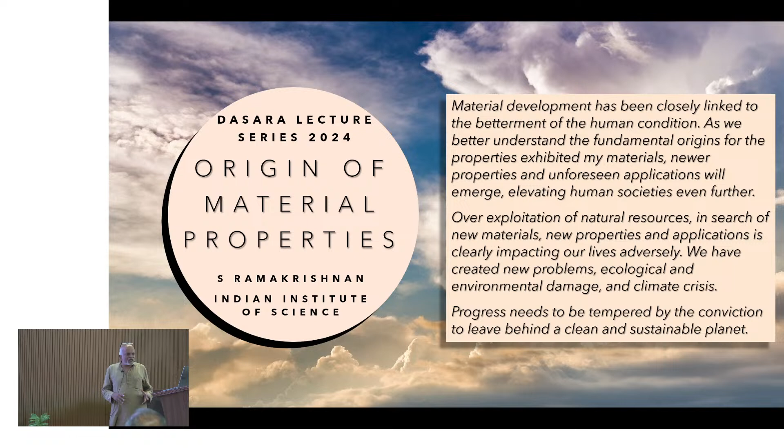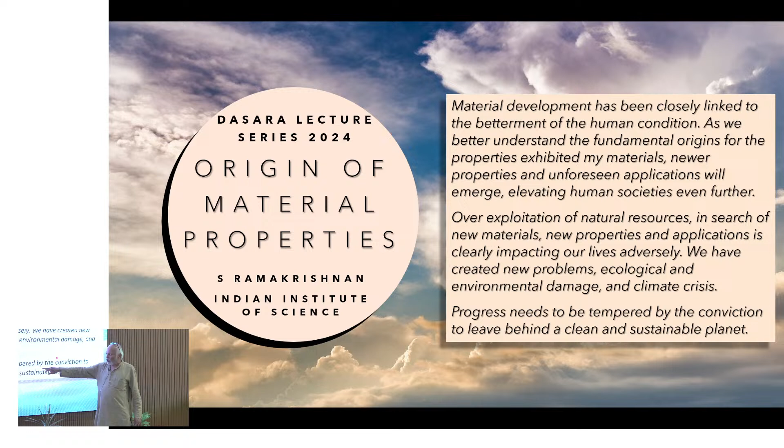So we are heading towards more difficult times while we exploit materials for our own benefit. We have caused too much damage already and will continue to cause damage unless we are tempered. So we have to progress, but progress needs to be tempered by the conviction to leave behind a clean and sustainable planet. So with that, I thank you all for your attention.

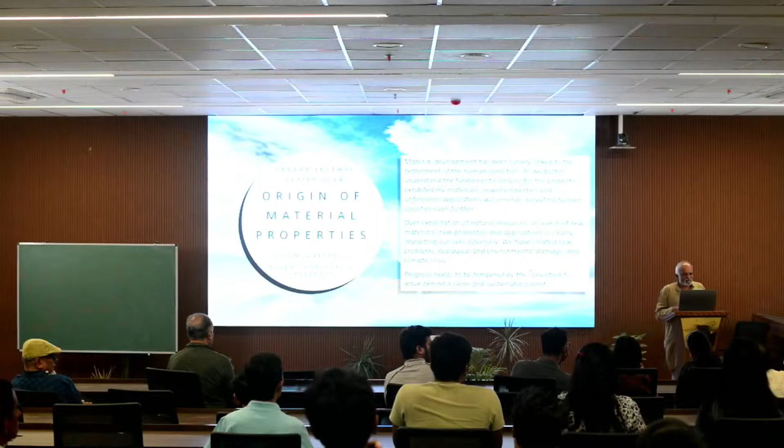I'm glad many of you showed up later. Thank you. Thank you, sir.

I'm sure you all agree with me that the progress of human society is linked to the discovery of new materials. How many materials, I cannot even count. The professor covered so many things in such an orderly way, starting with metals, alloys, special alloys, composites, nanomaterials, and finally polymers. I still remember being aware of certain polymers like polybutadiene, acrylic acid, acrylonitrile in our rocket propellants, or even hydroxyl terminated polybutadiene, HTPB. I remembered all those things after listening to the professor.

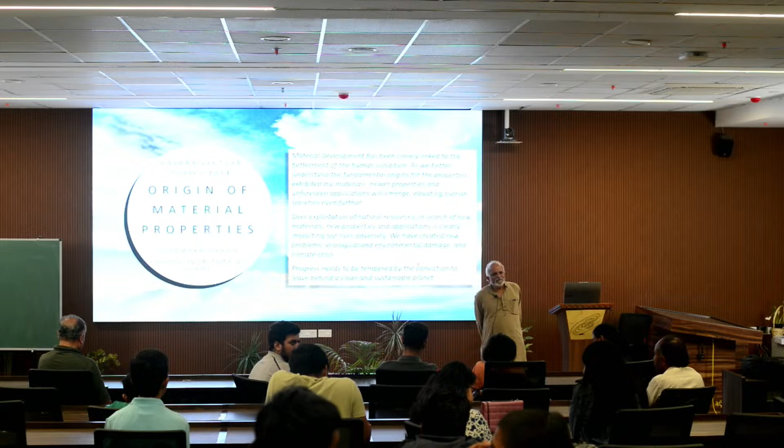Second thing, there are three different questions, sir. About phosphorescence, when we are using so much of this bioluminescence, are we not able to tap it for our needs for light? We have seen those weaver birds putting small lightning creatures and something like that. That is the first question.

Second thing, I have also known about this carbon. On the one side it is very soft, you use graphite. The other side it is a diamond. It is so hard. And it is really amazing that on one side it is soft and it is so hard. So something really unimaginable.

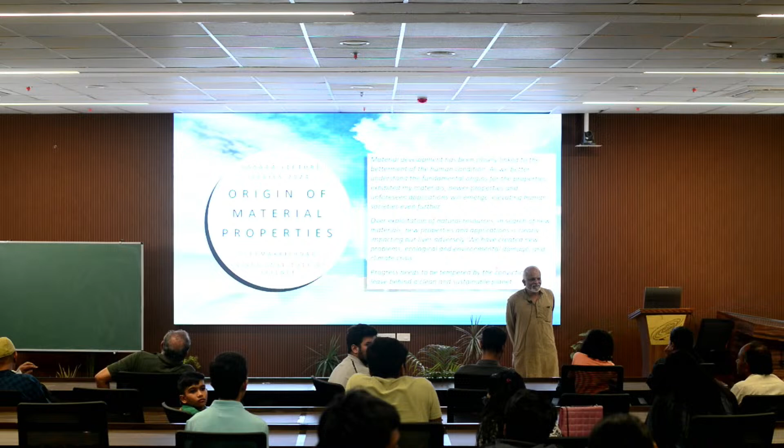The third thing is, unlike metals, why does this rubber lose its elasticity? Because after 2-3 years, if I just want to use a rubber, that tension is gone. Okay, so let me answer all the questions one by one. The first thing is bioluminescence.

Luminescence, fundamentally you should remember one thing, that the substance is emitting light. So it is giving out energy in the form of light. So, just applying the principle of conservation of energy, you need to supply some energy to the material to get out light. So, bioluminescence is basically a process by which the organism uses its energy, like we are using energy to talk, walk, everything. It uses its energy to put molecules in the excited state.

That means it gives it energy, like in photoluminescence or electroluminescence, we are applying a potential and creating an excited state from which it comes down to give out light. In bioluminescence, the organism is doing biochemical work. It is a chemical process, but biochemical, because it is in a living system that generates molecules in the excited state. So, it is supplying that energy and it comes out as light.

So, I am not sure what your question was, but that is basically the principle. So, you cannot use that idea in the context of using light emission for a device. That's one question, so let me answer the other two. The second one was about carbon, graphite, and it's just the nature of the bonding in the structure. Graphite is basically like benzene. You know the structure of benzene.

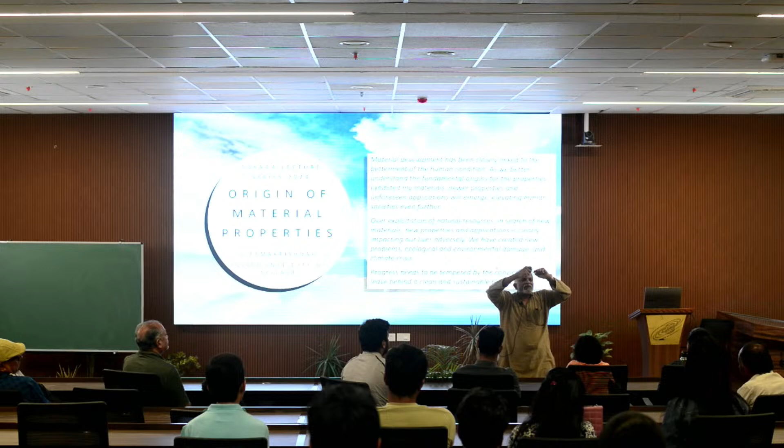Like nylon, for instance, if you keep it in the sun for a long time, after some time it just becomes very brittle. Your nylon ropes no longer have the strength. That is because of what we call photo and thermo-oxidative breakage of chemical bonds. Anyone else?

There was an online question which asked whether there is a material that is both light and strong. What is the best material with that property that can be used in, say, rockets? Well, aluminum and aluminum alloys are by and large today's workhorses. But there are lots of organic materials, especially carbon fiber composites.

You can have a pure carbon-based material in the form of a fiber, and that's called carbon fiber. These are extremely strong fibers, very light. They are not carbon nanotubes; they are actually macroscopic fibers, micron-sized fibers, like hair. When you reinforce those fibers in a polymeric material like an epoxy, you can generate a composite.

These epoxy carbon fiber composites are extremely strong, and epoxy can stand temperatures of 300 to 350 degrees centigrade. So these composites are gradually replacing metal, even aluminum. For instance, all your windmill blades: those of you who have gone on highways will see that windmill blades are extremely long, probably 50 meters each.